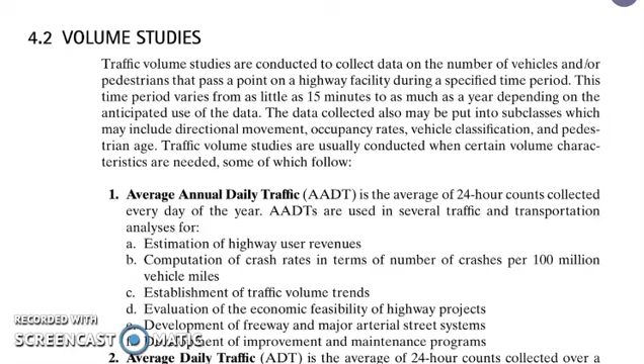Traffic volume studies are usually conducted when certain volume characteristics are needed, such as, number one, average annual daily traffic, or the AADT. This is the average of 24-hour counts collected every day of the year. AADTs are used in several traffic and transportation analyses.

So basically, it's used for estimation of highway user revenues, for the computation of crash rates in terms of number of crashes per 100 million vehicle miles, for establishment of traffic volume trends, for evaluation of the economic feasibility of highway projects, for the development of freeway and major arterial street systems, and for the development of improvement and maintenance programs.

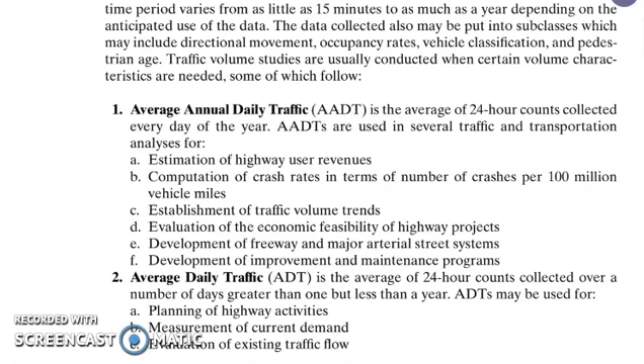Then the second one is the average daily traffic, the ADT. This is the average of 24-hour counts collected over a number of days greater than one but less than a year. So the ADT is used for planning of highway activities, for the measurement of current demands, and for the evaluation of existing traffic flow.

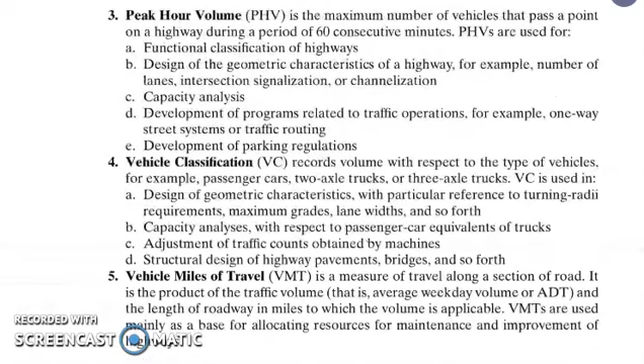And the third one, you have here the peak hour volume, PHV, which is the maximum number of vehicles that pass a point on a highway during a period of 60 consecutive minutes.

So the data collected on peak hour volume is used for functional classification of highways, for the design of geometric characteristics of the highway, for capacity analysis, for the development of programs related to traffic operations, and for the development of parking regulations.

The fourth one is vehicle classification. This records volume with respect to the type of vehicles, for example, passenger cars, two-axle trucks, or three-axle trucks. Vehicle classification is used for the design of geometric characteristics, for capacity analysis, for adjustment of traffic counts obtained by machines, and for structural design of highway pavements, bridges, and so on.

Then the fifth one is vehicle miles of travel. Vehicle miles of travel is a measure of travel along a section of road. It is the product of the traffic volume, which is the average weekday volume or the ADT, and the length of the roadway in miles to which the volume is applicable. So basically, the data for the VMT is used as a base for allocating resources for maintenance and improvement of the highway.

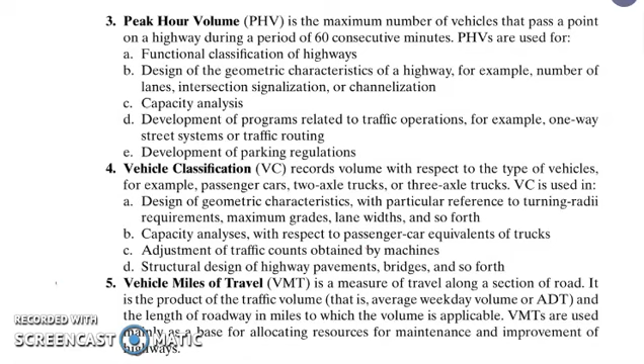Then we move on to methods of conducting volume counts. There are two methods: manual and automatic. The manual method involves one or more persons recording observed vehicles using a counter. With this type of counter, both the turning movements at the intersection and the type of vehicles are recorded.

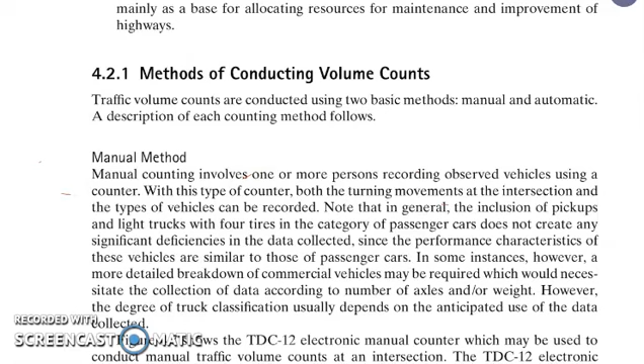Then for the automatic method, automatic counters can be classified into two general categories: those that require the laying of detectors, such as surface or subsurface, and those that do not. Automatic counters that require laying of a surface or subsurface detector on the road detect the passing vehicle and transmit the information to a recorder, which is connected to the detector at the side of the road.

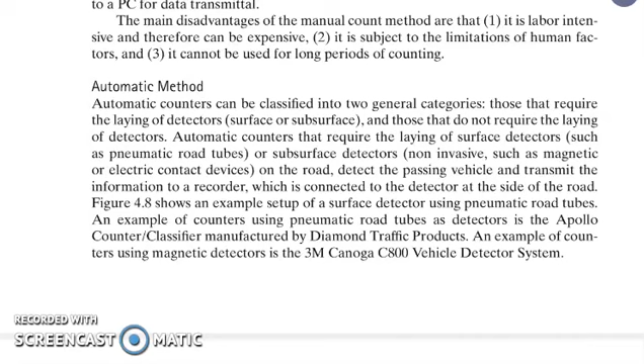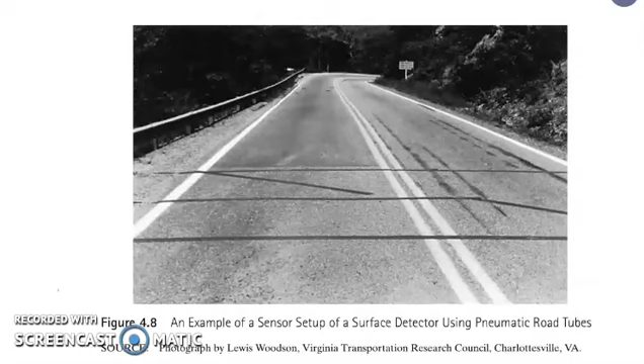So we have here a sample sensor setup of a surface detector using pneumatic road tubes. Then we have here the Apollo counter classifier, which is particularly suitable for cities and counties. It is capable of obtaining per vehicle or volume data.

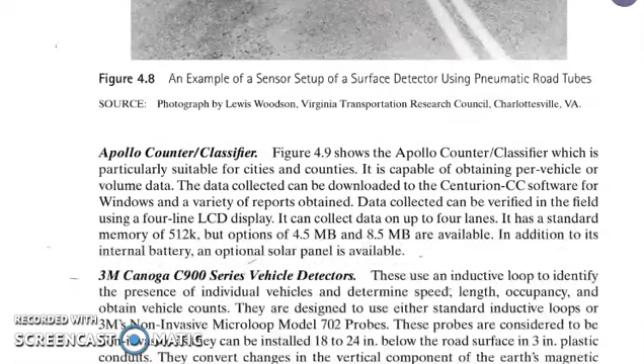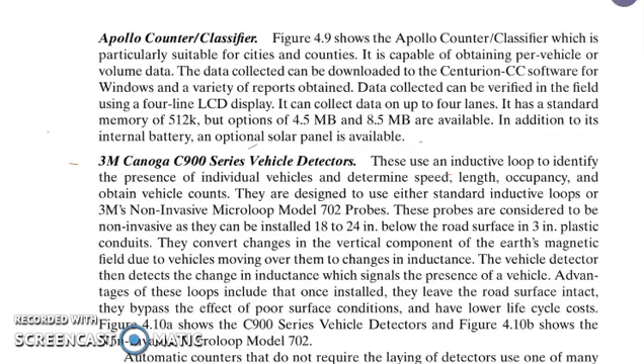Then the 3M Canoga C900 series vehicle detectors use an inductive loop to identify the presence of individual vehicles and determine speed, length, occupancy, and obtain vehicle counts. They're designed to use either standard inductive loops or 3M's non-invasive microloop model 702 probes.

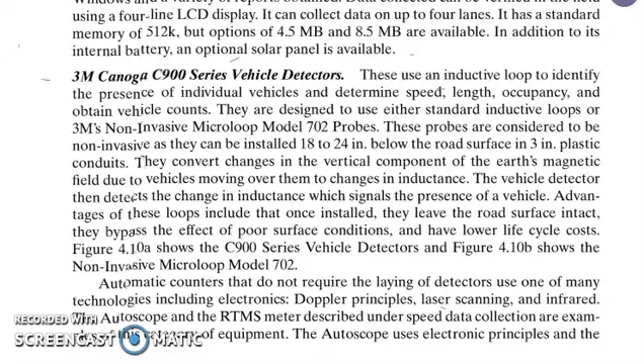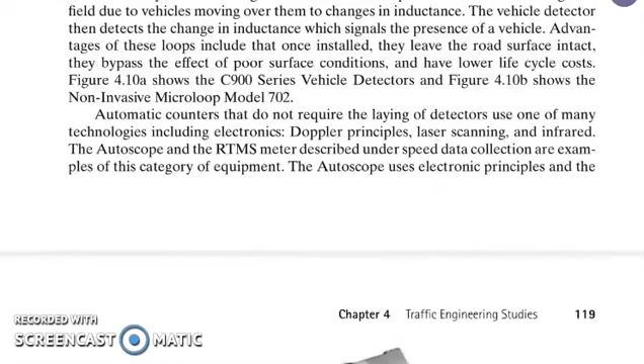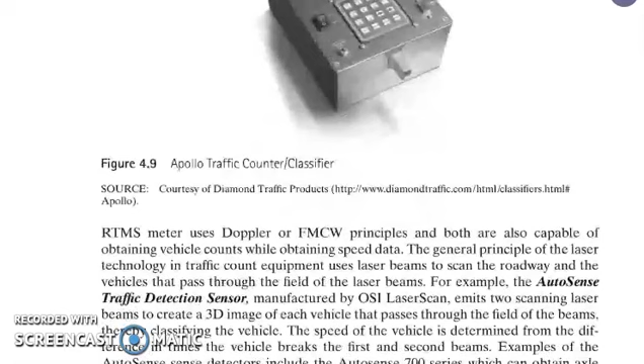Automatic counters that do not require the laying of detectors use one of many technologies, including electronics. We have here an illustration of the Apollo; this is the device for the Apollo traffic counter classifier. Then another one, we have the RTMS. It uses the Doppler or FMCW principles, and both are capable of obtaining vehicle volume counts while obtaining speed data.

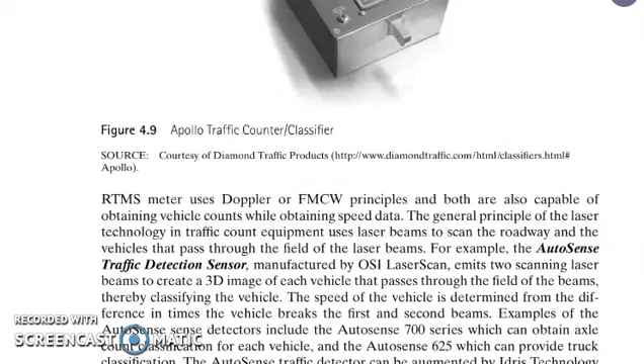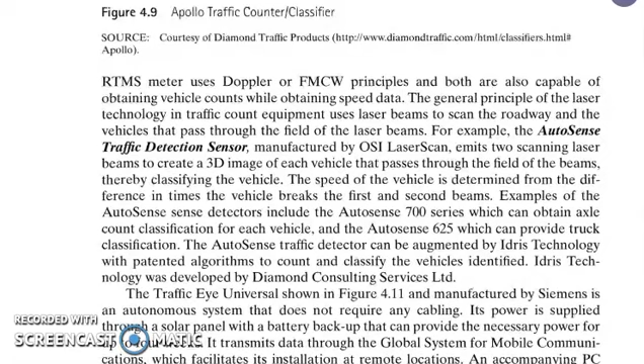Then for the AutoSense Traffic Detection Sensor, this is manufactured by OSI LaserScan. It emits two scanning laser beams to create a 3D image of each vehicle that passes through the field of the beams, thereby classifying the vehicle. So we have here the illustration.

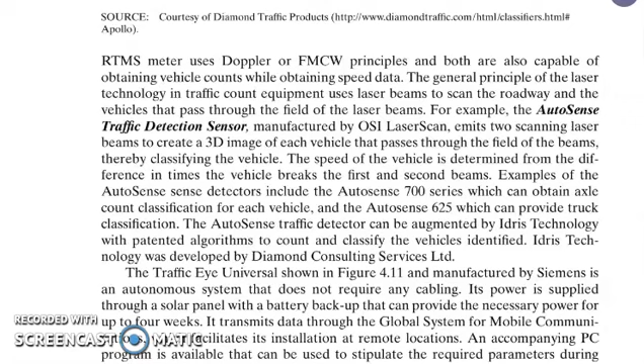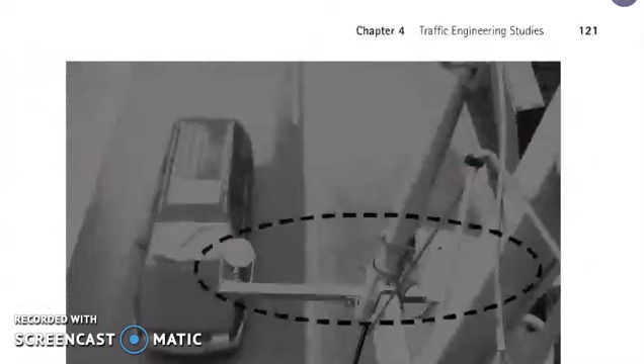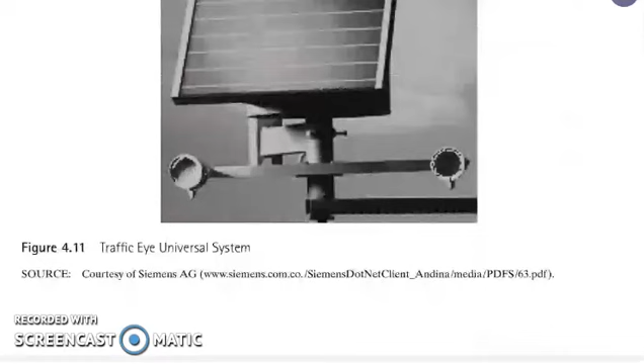Then we have here the Traffic Eye Universal System. So this is an illustration of the Traffic Eye Universal System being installed along the highway. And this one is an example of station locations of a cordon count. So we have here a cordon count on a specific station location.

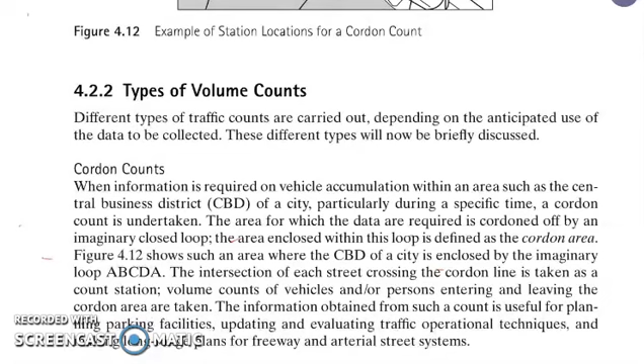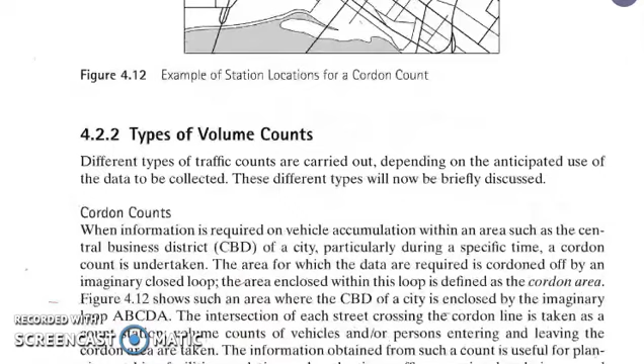Then we move on to types of volume counts. The types of volume counts depend on the anticipated use of the data to be collected. So there are different types. So we have here the cordon count. This is the illustration for the cordon count. When information is required on vehicle accumulation within an area such as the central business district of a city, particularly during a specific time, a cordon count is undertaken.

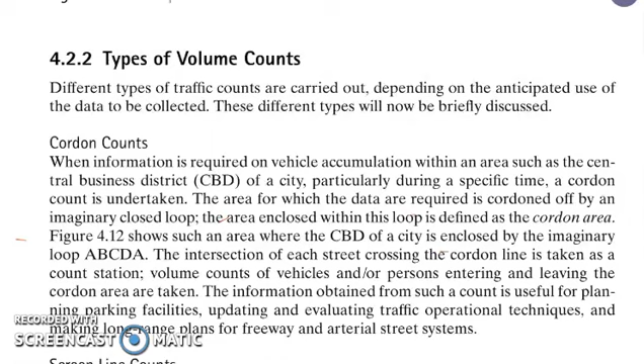So the area for which the data is required is cordoned off by an imaginary closed loop. The area enclosed within this loop is defined as the cordon area. So if you observe, you have a loop, and the area that is being cordoned is what we call the cordon area.

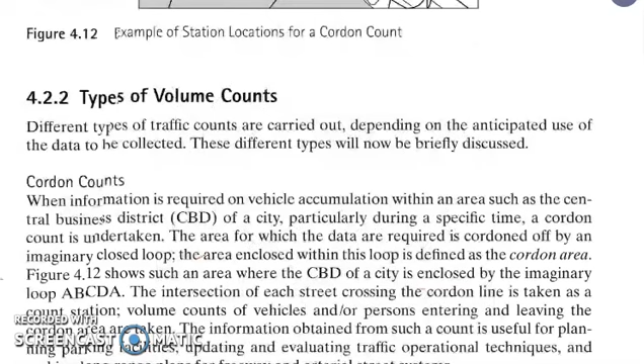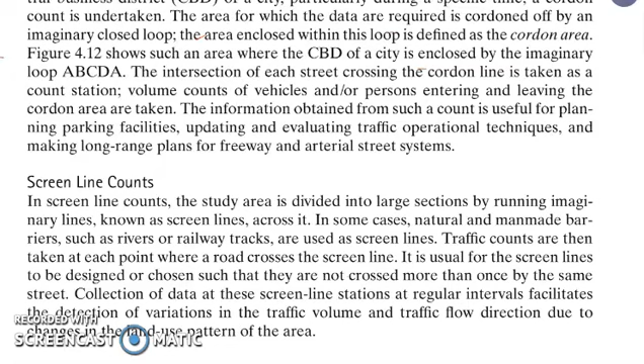Then screen line counts. For this one, the study area is divided into large sections by running imaginary lines known as screen lines across it. In some cases, natural and man-made barriers such as rivers or railway tracks are used as a screen line. Traffic counts are then taken at each point where a road crosses the screen line. The collection of data at the screen line stations at regular intervals facilitates the detection of variation in the traffic volume and traffic flow direction due to changes in the land use pattern of the area.

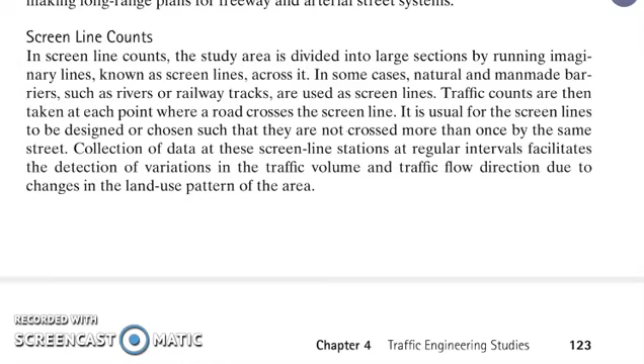For the intersection counts, these are conducted to determine vehicle classification, through movements and turning movements at a certain intersection. Basically, the data collected are used in determining the phase length and cycle times for signalized intersections, in the design of channelization at intersections, and in the general design of improvements to intersections.

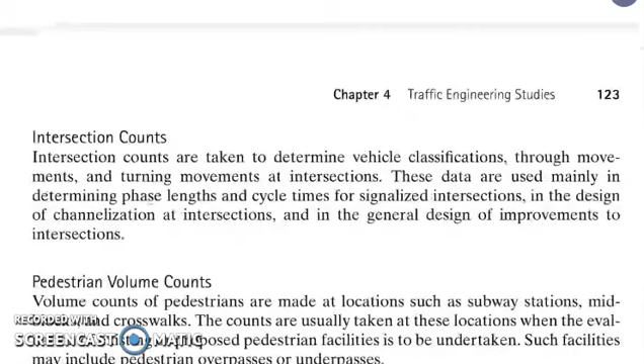Then we have pedestrian volume counts. These are made at locations such as subway stations, mid-blocks, and crosswalks. The pedestrian volume counts are taken at these locations when the evaluation of existing or proposed pedestrian facilities is to be undertaken. Such facilities may include pedestrian overpasses or underpasses.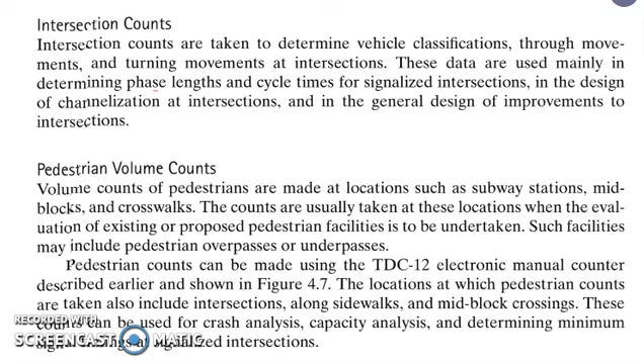Then for periodic volume counts, in order to obtain certain traffic volume data such as the AADT, it is very important to obtain data continuously. However, if it is not feasible to collect data continuously on all roads because of the cost involved, then to make a reasonable estimate of annual traffic volume characteristics on an area basis, different types of periodic counts with durations ranging from 15 minutes to continuous are conducted.

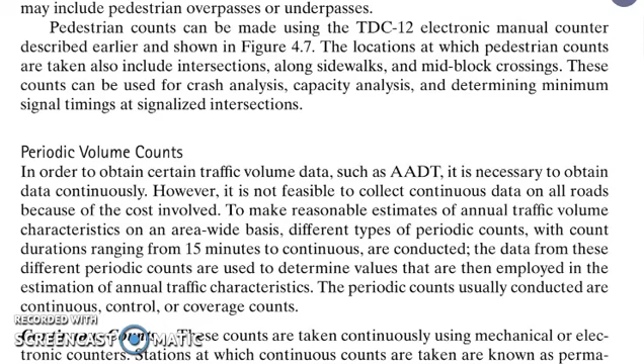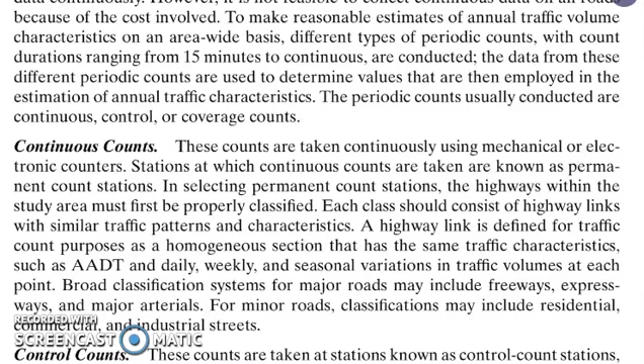Then for continuous counts, these counts are taken continuously using mechanical or electronic counters. The stations at which continuous counts are taken are known as permanent count stations. And for control counts, these counts are taken at stations known as control count stations, which are strategically located so that representative samples of traffic volume can be taken on each type of highway or street in an area-wide traffic counting program.

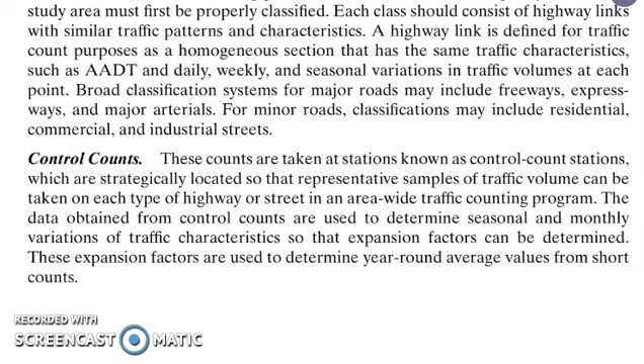And for the last one, the coverage count, these counts are used to estimate the ADT using expansion factors developed from control counts. The study area is divided into zones that have similar traffic characteristics.

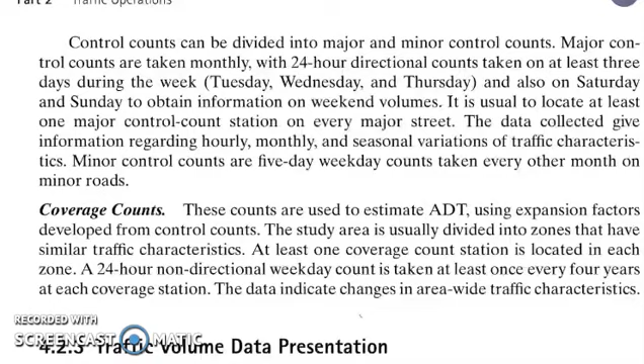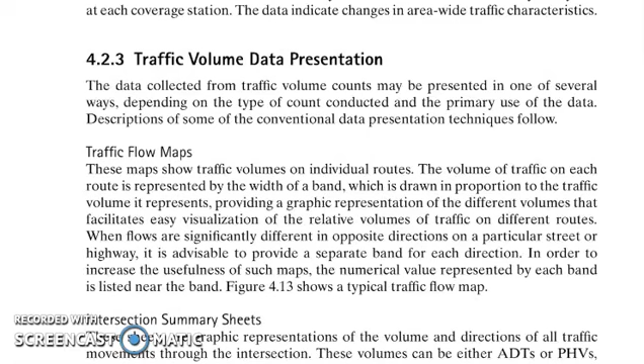Now we move on to traffic volume presentation. Basically, the data collected from traffic volume counts can be presented in several ways, depending on the type of count conducted and the primary use of the data. So here are some of the presentation techniques. We have the traffic flow map, which shows traffic volume on individual routes. The volume of traffic on each route is represented by the width of the band, which is drawn in proportion to the traffic volume it represents.

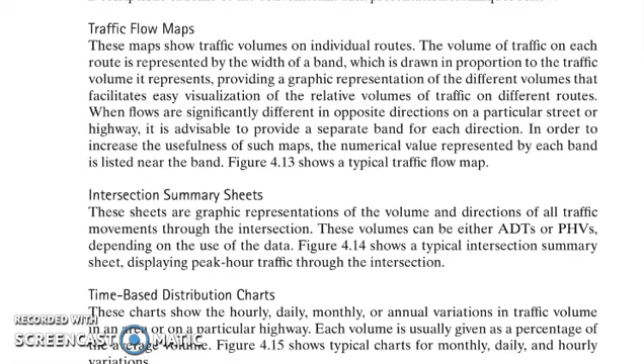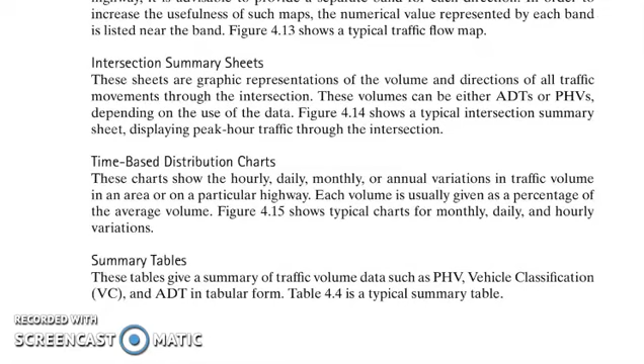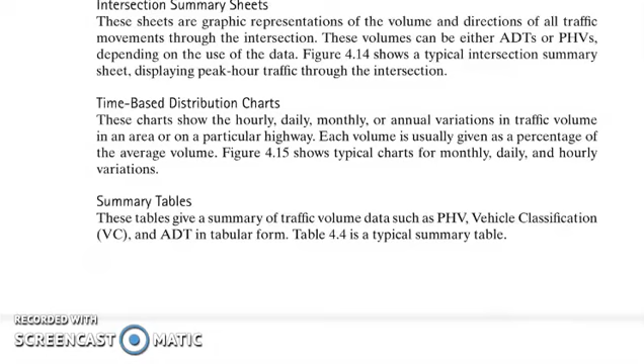Then we have the intersection summary sheets. These are graphic representations of the volume and direction of all traffic movements through an intersection. The traffic volume can be either ADT or PHV, depending on the use of the data. Then we have the time-based distribution chart. It shows hourly, daily, monthly, or annual variations in traffic volume in an area or on a particular highway. Then, of course, we have the summary table. This table gives a summary of traffic volume data such as PHV, vehicle classification, and ADT in tabular form.

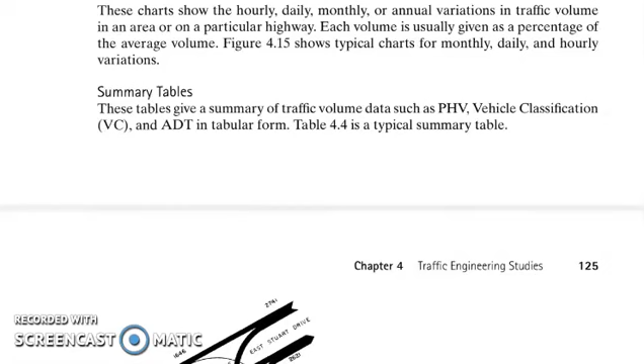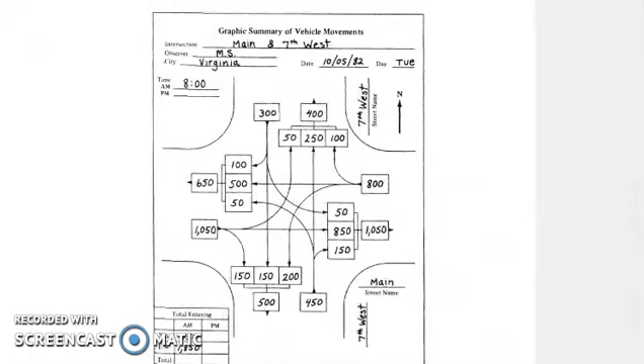So we have here an illustration of a sample traffic flow map. This is one way of presenting the data from our traffic volume counts, using a traffic flow map. And this one is through an intersection summary sheet. This is also a way of presenting our traffic volume counts.